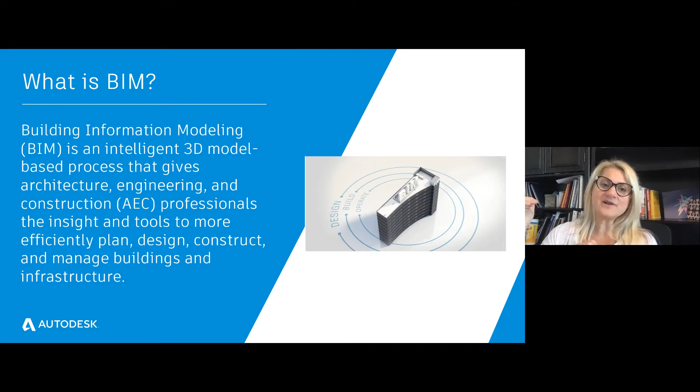So prefabrication is one of those fast cars, and I think we have to think of things in those terms. The end game is not to get on BIM. The end game is to utilize BIM to enable other innovations, things like prefab and all kinds of other stuff we're doing at Autodesk. Think of BIM like at a carnival, where you have to be this tall to ride the ride. That's how I feel about getting digitized on the cloud and enabling BIM in order to do better prefabrication.

Let's talk again about language. Some people think prefab is just this. They'll interchange words like modular and prefab and panelization, lots of different words, and think there's an end-all hierarchy. In fact, somebody told me yesterday, well, we all know the holy grail is to go modular. And I thought, no, actually that's not true at all. This is not the holy grail, it's just one tool in a big toolbox that happens to be appropriate sometimes, and other times not appropriate at all.

So I want to make sure we all realize that modular is not a hierarchy. It's not at the top of some food chain. This happens to be volumetric modules, which we'll talk more about.

But it's sort of my fault, I always say, that we focus on these big, sexy projects. I've worked in Singapore for the government there, and a lot in New York on tall volumetric modular buildings. It's the kind of thing the news likes to show us, like a hospital in China built in 4 days, a 57-story high rise. It's that soundbite that sounds good, so everybody talks a lot about it, which is why we think this is the end-all be-all. But it's actually not true.

I want to get a little deeper into the levels of what prefabrication is. This job is a 14-year-old job, this is not new. It actually got built, so I'm showing the drawing from it. But it has a lot of pieces and parts that aren't volumetric modules. It's creating the space with lots of pieces and parts.

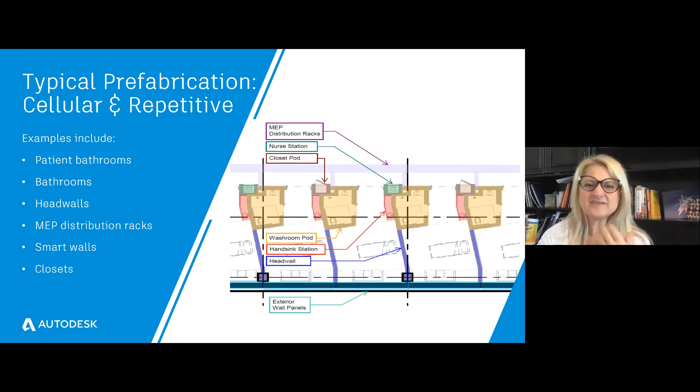Like here, you see these bathroom pods and this prefabricated head wall that has pneumatic tubing and all the MEP in it. That's the wall right behind the patient's bed. We have distribution racks for mechanical, electrical, plumbing, and exterior wall panels. All of these pieces and parts came together to create the space instead of shipping air in the volumetric module. So whenever I have to ship expensive air, I think, what can I break down into pieces and parts?

So the next place I always look is where the money is, right? Show me the money. And so I think, where are the most expensive spaces? The most expensive spaces are things like plant rooms, mechanical penthouses, processing skids, really places that have large, complex racks, even elevators. So I'm looking to decouple the most complicated bits out and build them concurrently while the site work is going on.

Because those really complicated spaces, what happens with them is there's something called trade stacking. We have to put a lot of different trades in a really small space, and they sort of have to climb over each other. And that's where a lot of the effort and energy comes from, coordinating the work.

Interestingly enough, one of the first jobs I ever did with prefabricated bathroom pods, I said to the superintendent on the job site, what was the best part about having these bathroom pods? I thought he was going to say the quality was perfect, or we didn't have all these people on site. But actually what he said was, the best thing about it was I got 7 a day. And I thought, oh, that's strange.

He said, it was the only thing I could count on every day, that I was going to get 7 things with a very finite scope. And what I did was I organized all my work around those 7 pods coming every single day, those 7 assemblies showing up on site. It was the one thing he had that was certain, that he could really base all of the other uncertainties around. I call it chaos to order theory.

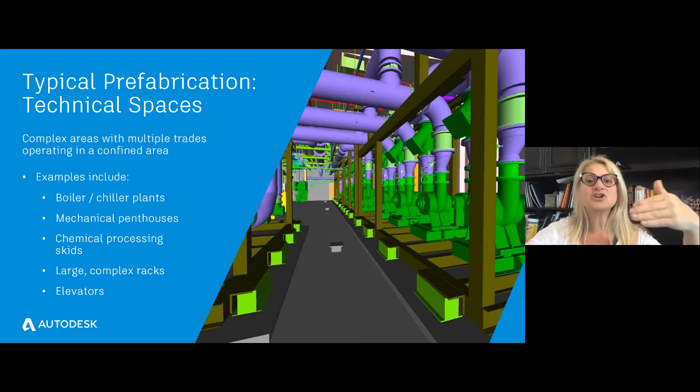Anytime you have something that is very orderly and coming in a takt time, like we say in manufacturing, that's very repetitive and consistent, you can schedule your work around it. So a lot of these big spaces, if we decouple them and reinsert them back into the jobs, it takes a lot of our effort away from being able to focus on the rest of the job, and removing this makes it that much more efficient. You gain a lot of value by removing things from the job site and building them concurrently like this instead of consecutively. So think: concurrency gains you value.

So then you don't have the person on site with the dirty fire caulk who's got to open up the tube and squish it out, and you're not sure if you got the whole tube, threw away the tube—now that's wet, you've got to get people around him. So it reduces drying time, curing time, waiting time, hot work—anything in that advanced building products area. That's what that does, right?

It decreases waste. Single trade assemblies, that's just like it sounds—it could be an electrical assembly, it could be a plumbing assembly, it could be a light gauge wall panel assembly, but single trade and usually somewhat simple that I can control. Honestly, oftentimes single trade assemblies don't even really need to be designed into the project because they're usually done by means and methods from the subcontractors. But if we ask for more of them, if we judge subcontractors based on their ability to provide single trade assemblies, the job site has less people on it, less chaos, and it's easier to manage. It's a safer job site. So those single trade assemblies are happening every single day.

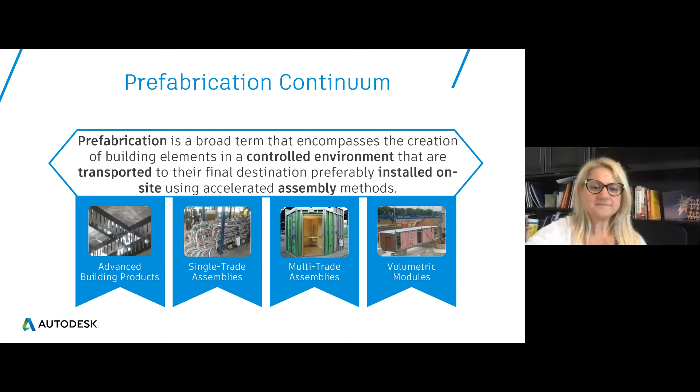So my next poll question: how many of you are using some of these prefabricated elements? I'm going to start the poll and let you answer. Those advanced building products you're using - any of the single trade assemblies, multi-trade assemblies, and volumetric modules. If you're using more than one of them, you can click on it.

The thing I want to go through is that just because you're doing volumetric modules, you could still be building that like a conventional construction company under a roof. The more you can use - I call it the Russian doll effect - the more you can put advanced building products into assemblies and have assemblies go into modules, the better off your project's going to be. We have to apply that manufacturing technique to the built environment.

So lots of people, just like I would expect, using single trade assemblies, few more using multi-trade, and actually a pretty good percentage using volumetric modular. So that's pretty good as well.

Advanced building products - I don't have a lot of architects on this call. I think if we had more architects on this call, they would be thinking about what they spec. That's an advanced building product, right? So that's a good indicator. Thank you guys for filling out that poll.

So let's talk a little bit about DFMA. DFMA does not mean prefab. Oh, by the way, I said I would talk about offsite. Offsite is literally just location specific. Going back to prefabrication, it's either prefabrication offsite, or sometimes prefabrication is done on-site. For those of you who have seen what's going on in London at the Mace building, they have a little factory at the top of their high-rise. Sometimes there's things that are near the job site. So offsite just literally denotes location for prefabrication.

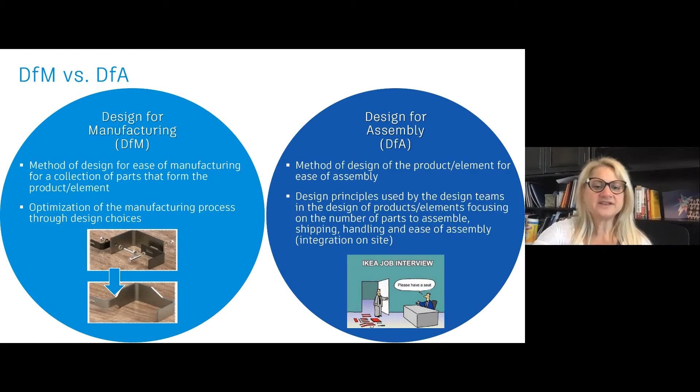We need to design that to enable that assembly to be easier, because that's where a lot of the money is on this site. On the site, they usually have a lot of things in common - they're trying to reduce material, overhead, and labor, shorten the design cycle, and really standardize a lot of things.

So here's what gets complicated about prefabrication. We talked a little bit about curtain wall systems. Imagine if you didn't have all that information from the curtain wall company up front in the design process - it would basically be impossible for you to use some of those companies, because we can't expect architects and engineers to know every single DFMA principle for every prefabricated element.

So there are generic DFMA principles, and I'll show you some, like design it once and use it many times - those apply to all these pieces and parts. But an element-specific DFMA principle would be like for the bathroom pod, where I want a single point of connection to make it easier to inspect on site and make connections like plug and play. That's very element-specific, and that's where it gets really complicated.

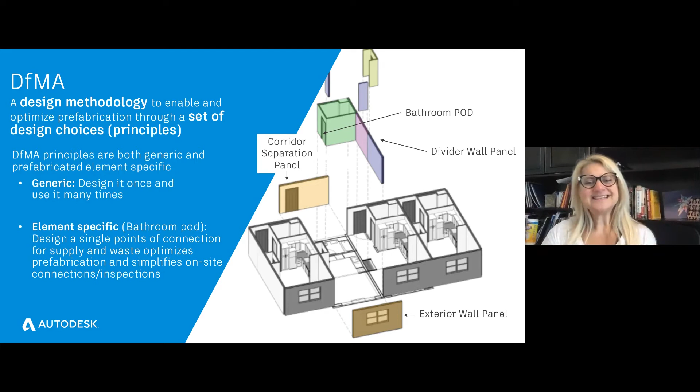That's one of the ways Autodesk can really help. We're enabling a framework, with our partners in lots of other places, to create that framework from concept to understand your options all the way through completion and operations. It's that DFMA intent for those specific elements that we can really get you smarter on.

And that's not just for creating the building - I ask myself all the time, why do we have 50-year plus lifespan buildings when tech changes like every 2 years? Why am I making a 50-year plus lifespan building if there will be newer and better materials out sooner rather than later?

So I think a lot about design for manufacturing and assembly in terms of disassembly and reuse - not just for the stuff we saw in COVID, where we wanted to take things apart and put them back together to move prefabricated hospitals, but also for permanent structures where I know I'll want to scale up capacity, like data centers, or want a technology swap out, like a semiconductor fab facility, or even a hospital with different technology in the MRI or operating rooms.

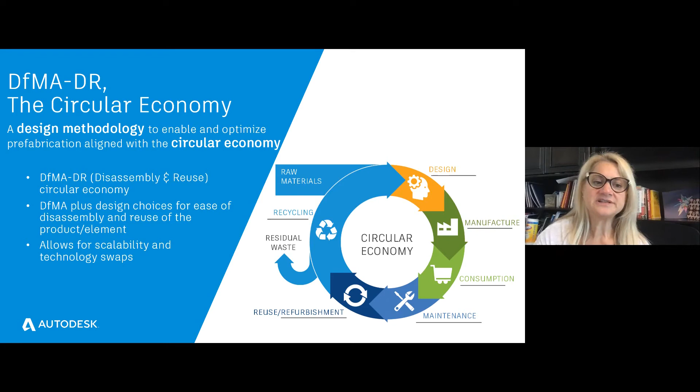Of course, that also helps with sustainability - that's the purpose of circular economy. But I think we can expand the definition for sustainability.

So DFMA principles that are generic in nature - these are the ones I teach for the most part. Things like designing for ease of fabrication and ease of assembly, modular design - not volumetric box modular, but pieces and parts that can create as many different outcomes as possible - and maximizing multi-trade elements when there are adjacencies.

Designing it once and using it many times, we talked about. I want to use things for multi-use - so if I'm creating an assembly, can I also make that assembly a structure that something else needs to sit on? Can I use it in a different way so it creates better value?

Using standard components means better lead times, easier manufacturing as well. But advanced building products, as we mentioned, and safety in design is a big one - how do I create this element to make sure somebody doesn't need to install it by getting on a ladder or using a crane if they don't need to?

How do I make it easier, even just safety in design for operations later? How do I make it so that the guy who needs to change the filter on that piece of equipment doesn't have to stand on a step stool? He can do it right from the floor. So when I'm doing this, I'm also balancing the ease of fabrication with ease of assembly.

That's a little bit more of an art form, unless you're using generative design like we have at Autodesk, where we're enabling some of the generative design concepts with prefabrication so that I can really understand what the right selection of pieces and parts are. Usually assembly is a little bit more expensive on the choice if I negate that choice than it is on fabrication. It just depends on the volume and how much the change needs to be made in the factory versus what the impact of cost is on assembly.

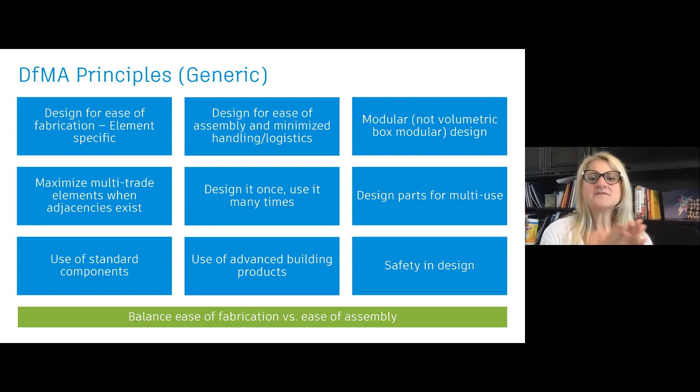So we always talk about housing and hotels for prefab, all those sexy stories. I don't know why. But what I'm finding is there's a lot more work being done right now in some of the high tech jobs where there's a lot more MEP, right? So that makes sense. For those of you that are subcontractors out there, there's a lot of work being done by the really good MEP super subs and some of the general contractors that are integrating vertically.

So the benefits of prefab - safety is always top of mind right now. I'm weaving a little bit of COVID into this. Obviously you guys are running into things like temperature screenings, extended PPE, hand washing and all kinds of stuff. The number one way you can actually create a safer job site - there's only really one way that trumps all other ways. And here's what it is.

Just get rid of the people on the job site. Exponentially, you'll be increasing safety by removing people from the site and putting them in a more conducive and controlled environment like a factory. So that is literally the number one way you can create a safer job site: by utilizing prefabrication, getting people off the job site.

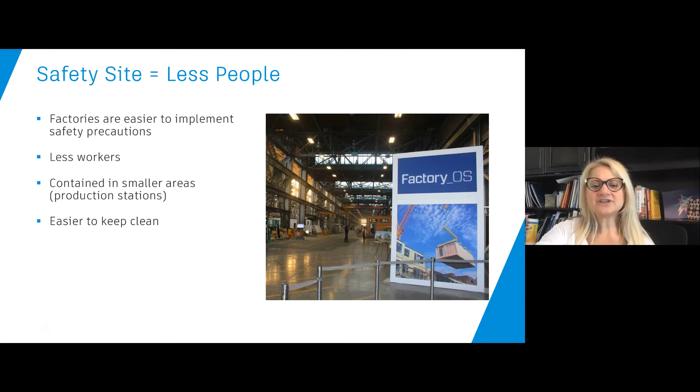This one happens to be Factory OS. It's easier to implement safety precautions in a factory. It can be cleaner, contained in smaller work areas. And we can implement some easier protocols within a factory.

We know right now that some jobs have been stopped and some are delayed. So we understand that out there. Some of the ways that a lot of people are talking about catching up is going to be by utilizing prefab. We know that in the latest study with McKinsey that they're talking a lot about both prefabrication and modular, which again, they've sort of mixed up some words here. So keep that in mind.

Modular and offsite construction, two totally different things. It's almost like saying volumetric modules and prefab. Maybe they mean modules and all other prefab. Estimated adoption alone can lead to a savings of about $22 billion a year. So that's an interesting study that just came out.

And there's some good topics on there about how they made 9 recommendations and they said industrialized construction would impact all of those in the future. So if you're not thinking about this - I have a client that says this is no longer a journey, it's actually a race, right? If you're not looking at industrialized construction like a race, you're already at the end of the pack.

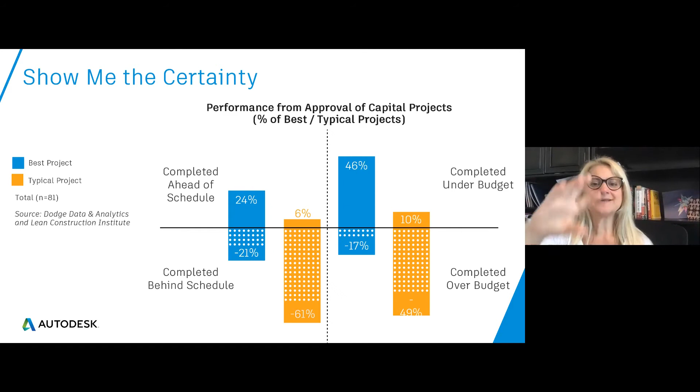Why does prefabrication have to enable us to be cheaper and faster? I asked that because somebody on those jobs that was late and over their budget said best project ever, right? I actually don't need to be that much sooner, because if most projects are 61% behind schedule, what am I doing if I'm even only 25% behind schedule? That would be a monumental increase. But I'm always shooting for on time and on budget. That's what we want to shoot for right now - prefabrication is that certainty, that predictability, utilizing IC and the data to get certainty, right?

So I never talk about savings until we're getting really good at this. I want to talk about smoothing out the labor on the job site, getting more control, potentially shorter schedules depending on what you can build concurrently, and just having an easier job site to manage. Reduce site disruption and make it easier to manage.

There's lots of numbers also in this Dodge report if you want to read about how prefabrication is helping with some of the metrics we typically look at. I'm happy to see they're not talking so much about savings. They've adopted our language at Autodesk, which is about certainty and predictability. I really appreciate that.

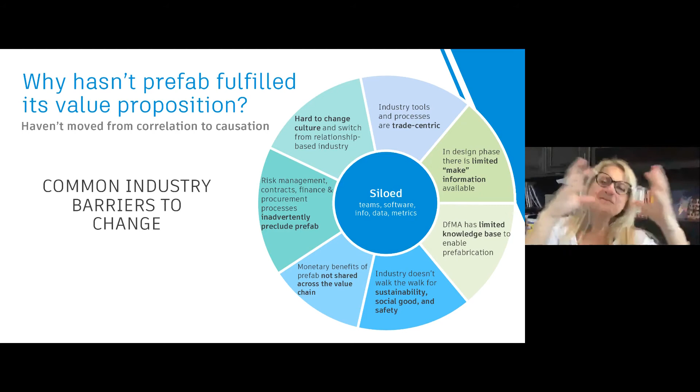I always say, listen, guys, you will never assemble construction if you stick-build design. It's just that simple, right? You cannot stick-build design and think that you're going to assemble construction.

We also, let's face it, have a hard to change culture. We've got a lot of people beating on their chest saying we've done it this way for a really long time. And all of our tools and contracts and procurement methodologies are set up as trade-centric.

Even though you're doing lean, it doesn't mean that prefab is enabled, just for the record. I have a whole other presentation on lean and prefab. Just because you bring people up to the front of the process doesn't mean that they're actually going to prefabricate things, just so you know.

We have to start really walking the walk that we talk about with productivity and sustainability and social good. We really need to expand our definitions about sustainability into economic sustainability, industry sustainability. And again, we've got to stop being so project-centric.

Late engagement always kills prefab. You got to do this before there's even a job. That's why we're out here educating, right?

That silly apples to oranges comparison - yes, stick framing is cheaper than a braced frame. It doesn't mean better, it doesn't mean easier, it doesn't mean better flow, it doesn't mean overall the life cycle of the cost is less expensive. So we have to think about things differently. Start asking if it's easier and not asking if it's cheaper.

The conventional procurement process doesn't work. We need to understand how to get integrated up front, not just with getting the people up there, but having the right software and the framework to collaborate over the course of the project. It's actually less about getting the knowledgeable people up front and more about being able to share that knowledge across the platform with more and more people.

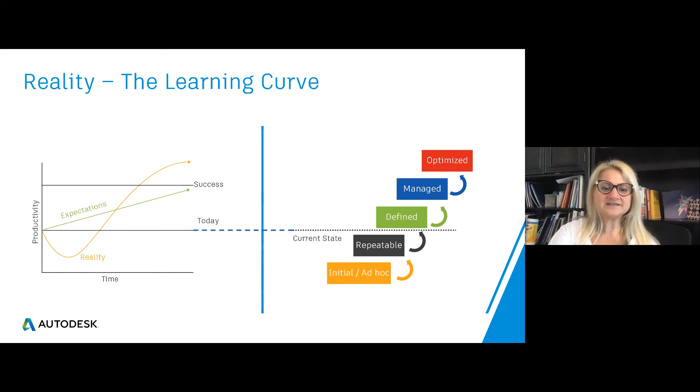That's important. So we need this because we have a skills gap and we have productivity issues. I don't want to show the productivity chart like everybody else does over and over again, but jobs are getting harder and we have less labor. And we do need growth for our businesses and improve sustainability in the most broad form of the term, right?

We need industry sustainability right now more than anything else. And really it's about reducing risk, right? That's what this is really about for the owners. And I think you'll see a lot more of the owners demanding that people get digitized and get collaborative and think about things like industrialized construction.

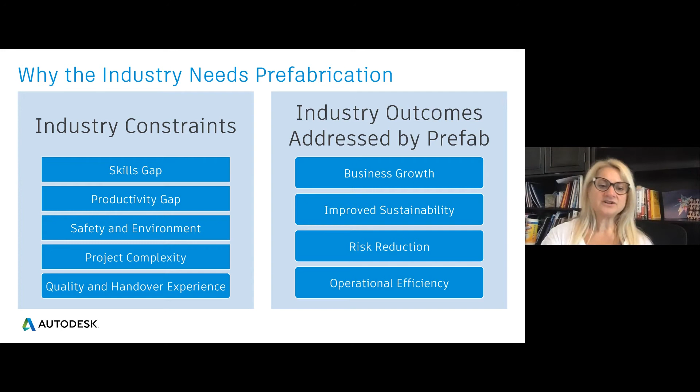Because what we have now is faith, right? We all know that prefabrication in our hearts makes sense.

We have some correlation, but unless you get digitized and get on the data and have a platform that you can actually work across that's seamless, it's very hard to have causation. It's very hard to have predictive analysis, very hard to have certainty. And that's what it's all about. So you've got to get on this journey so that you can get to causation as quickly as possible.

You can download this report, The Future of Work in Construction, at Autodesk. It's very interesting about how this is going to change the jobs.

I only bring this up as well for COVID, because we have a lot of people in this world that are going to be out of work in lots of different countries. And we have an opportunity now to grab some of this talent and bring them over to our country, to our industry, and show them how great it is to be in the design, build, manufacturing environment.

You'll see a lot of different skills out there, new teams. If you recognize any of these skills, people that are out of work, pick them up right away, because this is what we're going to go towards. We're going to go to new roles with new skills, with new collaborative teams that are much more data focused, much more supply chain and manufacturing focused, and thinking more in terms of production.

So the role of industry and government—the last thing I'll say about our industry is we have a responsibility to do this, not just as Autodesk but as an industry, to get better so we can survive and have sustainability for all the people that live in our communities, because we are creating the future with construction and design.

Role of government—if any of my guys on here are from the government, I always say please don't give out any stimulus money unless you're going to require the use of BIM, prefabrication, and anything that has to do with collaborative software, so we can actually get people to a better place so they can pivot. And next time something like this happens, we'll be that much more prepared.